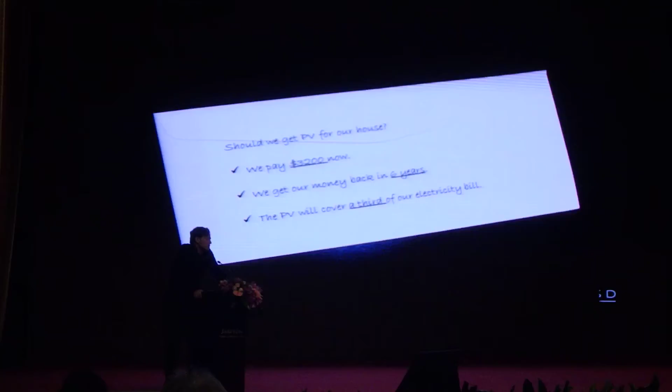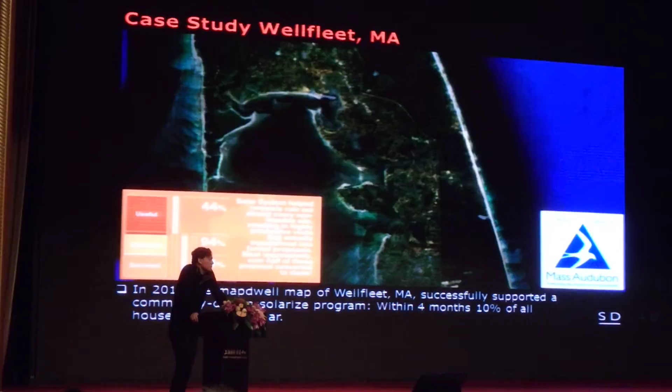How well does it work on a larger scale? In order to understand that, we collaborated with the town of Wellfleet in Massachusetts, which is on Cape Cod, which some of you might know. And we worked there with the Mass Audubon Society in a solarize program. So they went to everybody in Wellfleet and said, get PV for your house, look at our map. And a lot of people did.

They contacted the solar installers in the region. The solar installers discarded, by looking at the map themselves, 44% of the projects because the roof wasn't ideal. And then when they actually went to a site, 94% of the time the installers made a proposal. And the best part is that 54% of the time the proposal was accepted. So the rate was really encouraging. In 4 months, 10% of all the households bought a PV system.

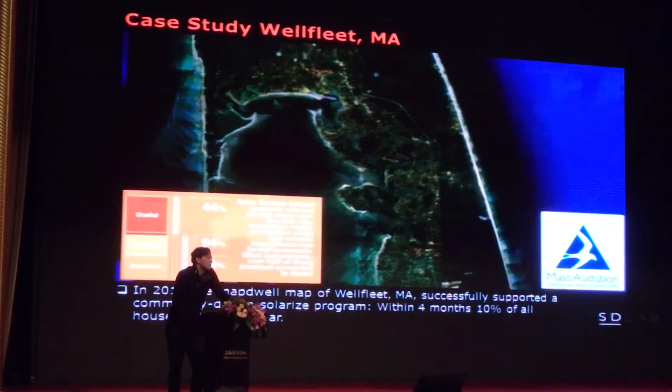And this just shows you the advantage of getting information, unbiased information, to both sides, the client and the installers. So we are hoping in cities to create equal types of penetration over the years, but with more diverse technologies than this. And that brings us to UMI.

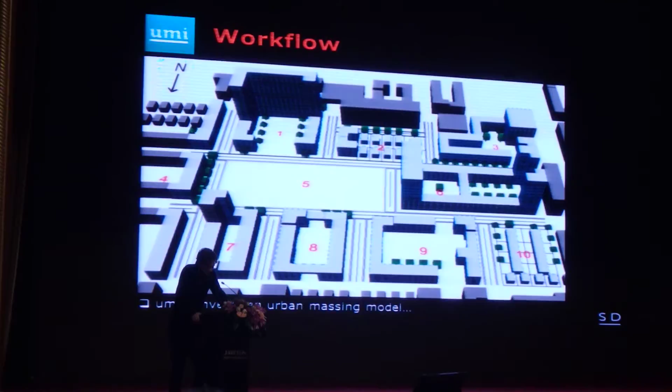UMI right now, if you want to use it in the urban planning or the architecture world, you can go to urbanmodeling.net and download it. It's a plugin based on top of a CAD environment that's widely used in urban planning and urban design called Rhinoceros 3D. When you open it, we are actually creating a kind of BIM database for a city. And then what you have to do is draw a massing model of your city, buildings, trees, and streets. And we then convert that into an energy model, for example, that allows you to do a very detailed analysis.

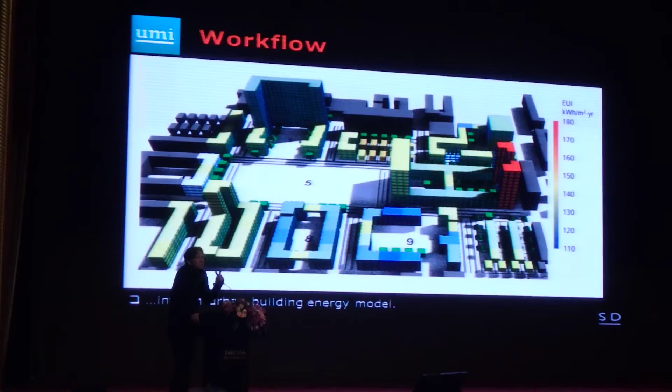So of course the question might be, especially if you do BIM in that field, where people routinely pay $15,000 and more for an individual building model, is this model any good? This is what I'll try to talk about in the next 10-15 minutes. So how does one actually build an urban building energy model? And I know there are quite a number of individuals in the audience that do similar work. We recently wrote a review on the topic, and I hope we didn't miss anybody. If we did, it wasn't intentional.

So what are the key ingredients that you need to model the city? Well, you have to understand the weather and hourly data. That's a very well-established field. There are lots of databases for this available. You can combine this with urban heat island effect models. You can look at the future. That's a research branch in our field that has existed for a long time. And you can use similar tools at the individual building and at the city level.

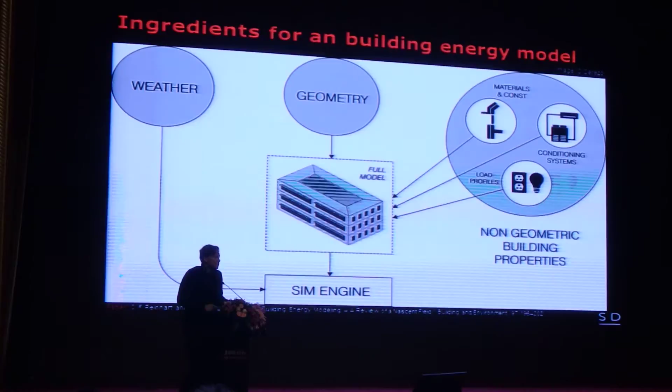Then for the city, you also need the geometry of the city in sufficient detail. You then need what we call the non-geometric building properties. So you need to know all these things that are hard to get. How is the city built? How is it being used? What kind of HVAC systems are in place? And you combine all of that in a simulation engine and get your output.

So starting off with urban massing models, where do you get that from? In the easiest case, in most of the Western world, you would get from the city GIS data floor plans, and if you have the building height, then you can extrude that and you get these 2.5D massing models of the city. That's an easy start. These models often are not that good. The main reason is that people are not clear what the building height is. Is the building height the lower part of the roof? Is it the top of the roof? That doesn't apply everywhere, but it's a good first start.

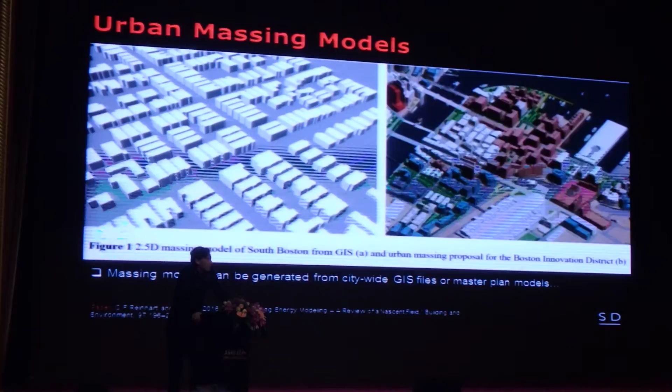Of course, when you look at innovation districts or new environments, you will often have something that you see on the right-hand side, very detailed massing models that the urban planning office is providing for you anyhow. Now it becomes really academically, or just technically, challenging when you're in areas where there is no GIS model. So we are building a model of Riyadh right now with 5 million people. I thought that was a big model, and then I heard Darren is modeling Shanghai with 24 million people, so I felt utterly inadequate this morning. But in Riyadh with 5 million people, there's no GIS, but lots and lots of LiDAR data.

Because for the oil fields, LiDAR data is collected all the time because people want to know how the sand dunes move. LiDAR stands for light detection and ranging. That's a technology where you fly with an airplane over an area and you collect point cloud data of these surfaces.

So what we are working on with the Center for Complex Engineering Systems in a case like this is that we are creating, based on an analysis of LiDAR, three-dimensional models, such as the one you see on the right-hand side. So all of this is to show that in terms of geometry, we tend to have in most parts of the world sufficient data to create these types of models.

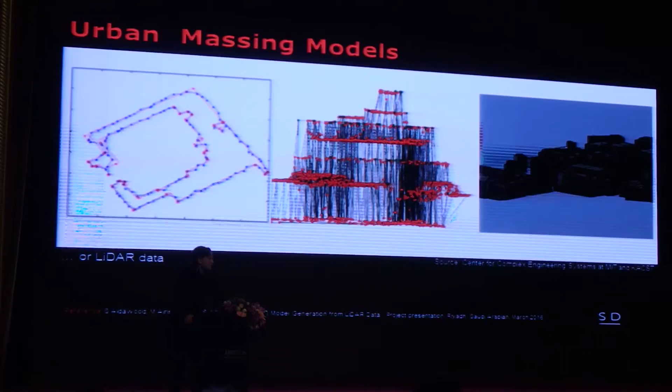One of the members of our group, Timur Dogan, who is now a professor at Cornell, developed this algorithm that we call the autozoner that can automatically generate an ASHRAE 90.1 Appendix G compliant energy model out of any form and shape that is possible. And you could, in this way, automatically, out of the massing models that I showed you before, create an urban energy model. The effort level for that is a little too high because the models would run too long.

So what we are using instead is something that we call the shoeboxer. The shoeboxer is an approach where we are taking a whole city and breaking it up into representative little shoebox models where one side touches the outside facade. It seems like a gross simplification of the actual thermal models that are used in practice, but we found that the approach at the urban analysis level works extremely well.

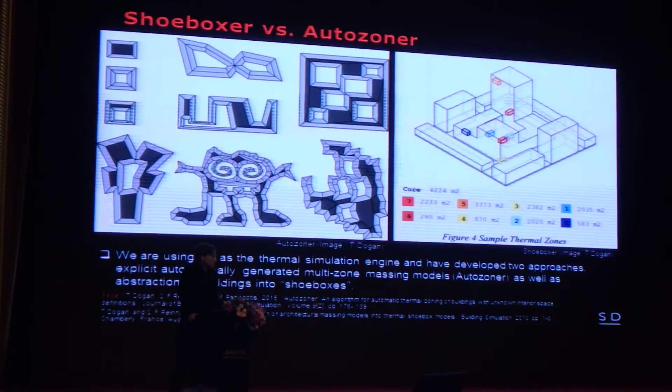So now we have nearly everything. We have the weather, we took that from other people, we have the massing models, we have a simulation engine. Now the tricky part is of course getting all this non-geometric building information. How will we be doing that? But starting off, at least we're trying to make the process as painless as possible by developing a data format that can be used by a lot of people so that if we've done it for one city once, we can do it again.

The next step is to say we, of course, are not going to model every single building in the city, but we have to take a whole building stock and do what has traditionally been done: create archetypes where you group similar buildings together. And then you only need this input for one building at a time.

Once you have this data combined, and we right now have archetype libraries for Lisbon, Portugal, Boston, and Kuwait, then you don't have to do the work again. If you have a city next to Lisbon, you could basically repeat that, and that way the effort you spend building a building library the first time pays off. So this is the process of how you can create an urban building energy model.

But now, of course, the question is how good are these models overall? So we have a workflow, but we have no idea if the workflow is any good. So in order to understand that better, we started off in Kuwait City in a neighborhood called Al Quidiziah, where we looked at 200 buildings initially. And these were all single-family homes, or they call them villas there. You see Al Quidiziah on the left-hand side.

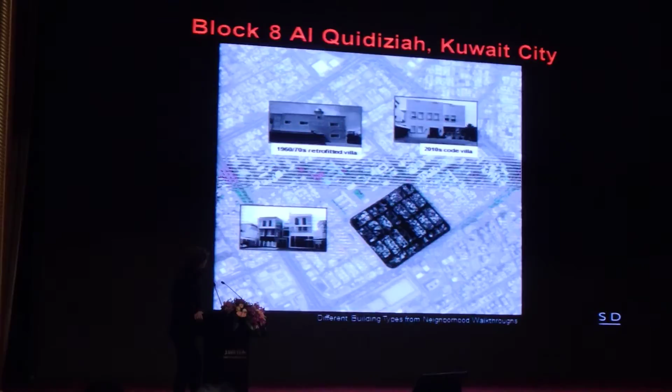So our first attempt was to just say we're modeling this neighborhood, one building type, one type of occupant, and then you see here our energy use intensity distribution in dark gray, and in light gray you see the measured results. Okay, so we weren't very close there. Then we went into the neighborhood and understood the building archetypes a little better.

The building stock divided it into 4 different building types. And then we got 4 different building types, 1 type of occupant behavior. We got the spread a lot better. It got only really interesting when we started using a Bayesian approach to model occupant behavior in buildings.

And the way this works is we use a sample of buildings and we create 800 different stories of how a building could be used. So we have families with lots of family members, high density in the building, and a lot of equipment, high thermostat settings, and we have all kinds of combinations of those. Then we throw these different stories at the buildings for which we have measured data, and what we find is that only some of these stories stick.

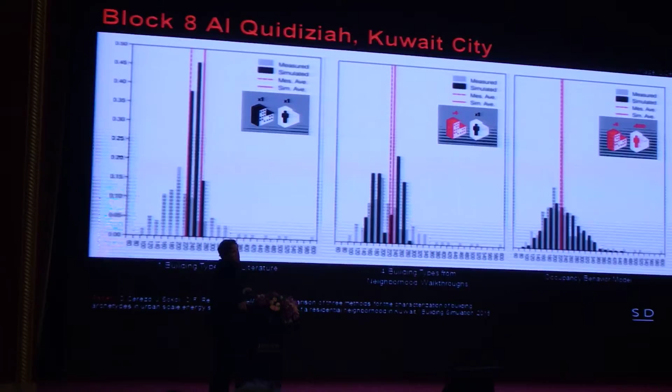We don't know which of these stories are true because we can't go into the building easily due to privacy concerns, thank God, and figure out what's going on in the building, but we get likelihood distributions of behavior. And then when we want to model a neighborhood, we model each building 100 times. That gives us an uncertainty for a building, and if we overlay that for all buildings, then we can create this variable. So in this first study we were cheating because the data that we used to calibrate our model and the test model were the same.

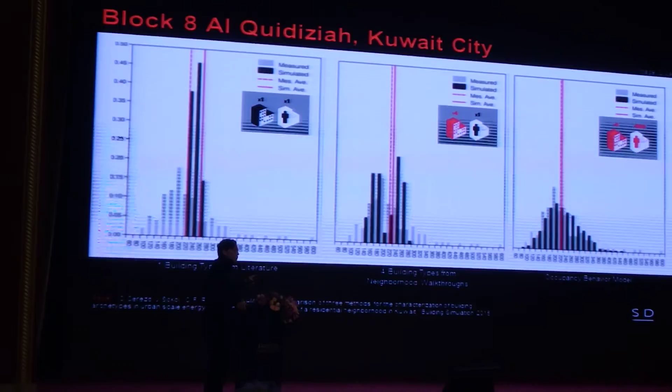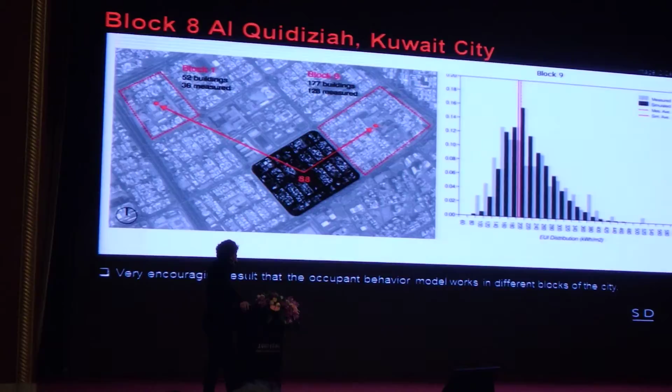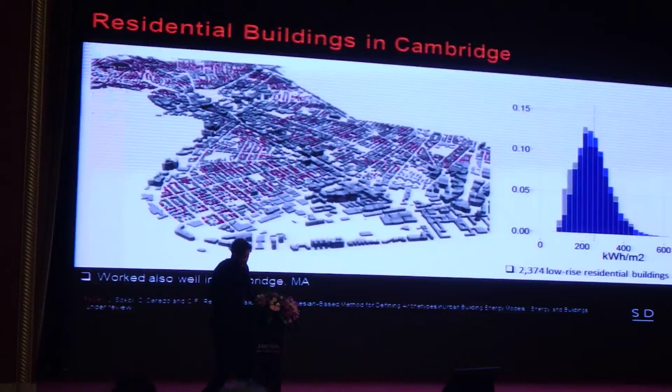So then in the next step we went outside of the neighborhood that we had looked at before, and we modeled other blocks, so different buildings, but we assumed the same behavior, and there our model still held very well. So then we went back to Cambridge, Massachusetts. We picked 400 buildings for which we had monthly energy data. We modeled 400 buildings, created our building behavior model, and then tried to model 2,500 different buildings. And again, as you see on the right-hand side, this works very well. So based on that, we know we have a technology that really allows us to pin down energy use distribution in a neighborhood. I quickly, in the interest of time, go into more details.

What this means is when you have annual energy data, then your calibrated model will also only be able to rightfully model annual energy use distribution. So you really have to fit your data. If you want monthly results, you also need monthly data to calibrate your model to. And in Cambridge we showed that this is a poor fit if you use a model based on annual results to look at monthly energy use intensity distributions. You get way better results if you use monthly measurements.

Okay, now we are in the enviable situation that we actually have a couple of building models in the world which are calibrated. What can the computer actually do now for us that we didn't know before? So the first thing was just looking at what-if scenarios. That was pretty standard. We worked in Kuwait City. We did a symposium for half a day last December. We invited key government officials and other industry stakeholders, and we showed them that for this neighborhood, if you put in off-the-shelf technology, you could reduce the energy use of that neighborhood by 85%. And that was really interesting because it allowed us to highlight the opportunities that buildings offer to decision makers, and it also allowed them to develop aspirational goals. That's possible.

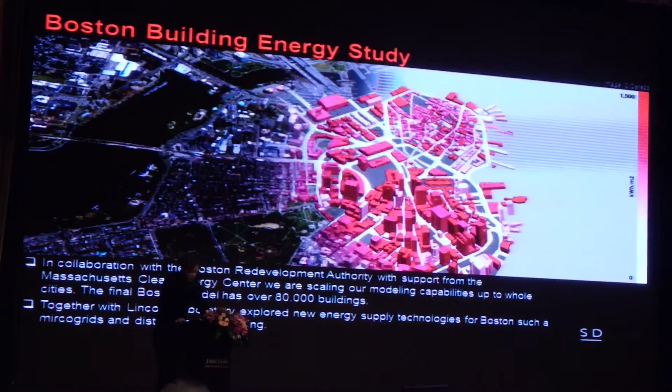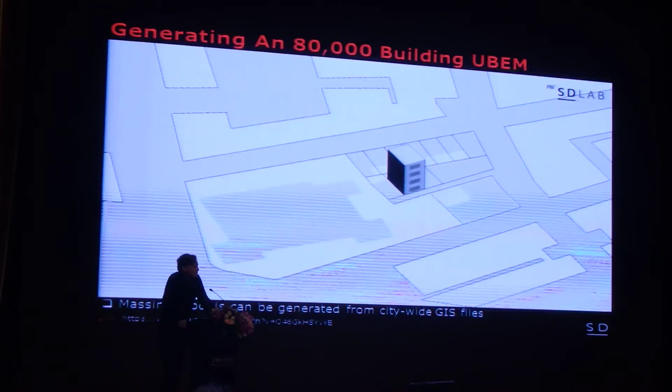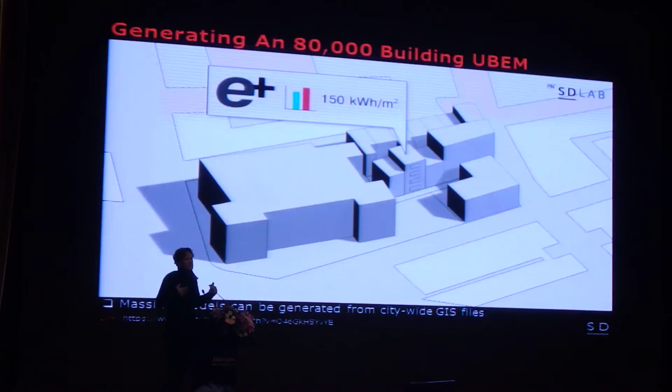Of course, one could say, well, do you really want to base your whole analysis on just 200 buildings? So in order to show that the same concepts also work at a larger level, we worked last year with the Boston Redevelopment Authority and did an energy model of Boston with 80,000 buildings. The process is the same as you see here. We use the GIS data set. We automatically extrude it to find the floor areas, where the windows are, where the neighboring buildings are. And then we run an EnergyPlus model for each building in the city. And the main effort here was really to automate the process and make it so robust that you don't have to do anything by hand anymore.

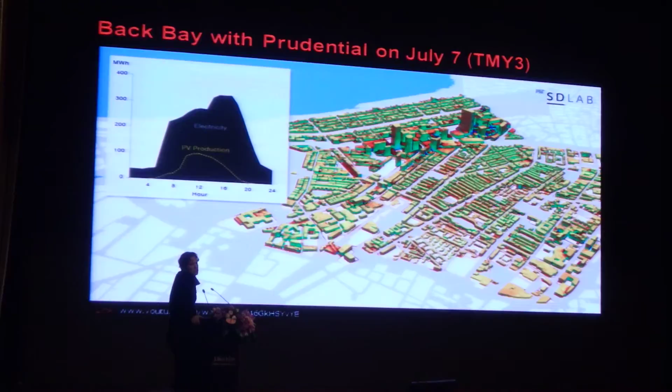What do you get from that? Well, you can get these energy use distributions within a city. You don't learn too much because intuitively it's clear that the downtown core uses more energy than the surroundings. I think it becomes more interesting when you zoom into a neighborhood. This is Back Bay and Prudential Center in Boston. We actually look here at the hottest day of the year, so you see the electricity use simulation for that neighborhood on the hottest day of the year. And if you then say, well, what would happen to the distribution if we were to introduce photovoltaic production, then you get this famous duck curve.

So in light gray, you see the current electricity use simulated. If you were to introduce a lot of photovoltaics, it's pretty well established, then we know the two don't coincide in peaks. You get in the middle of the day PV, in the afternoon the air conditioning peaks. So you have this duck curve. That's very difficult for a utility to match this load profile.

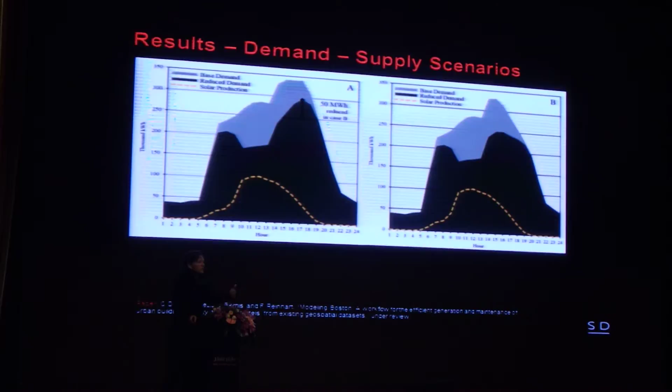So what we looked at here, what would happen if we had a smart grid solution where the utility could relax the thermostat settings by about 3 degrees Celsius of every commercial building in the neighborhood. And the interesting part is really here, from a technological standpoint, if you follow these solutions, you have one central control for all the Nests in the city, then you can dramatically reduce the peak loads. There are, of course, very valid questions of privacy, but this really provides you a framework to quantify the benefits of doing this.

This project is something that I really like, From Targets to Reality, that was more zooming into a particular neighborhood in Boston called the Dudley Square neighborhood, and looking at energy use as well as census data. So based on census data, we can tell for every building block in that neighborhood who is living there, what's the educational level, what's the income level. We broke that whole neighborhood population into 4 types: elderly couples, families, young professionals, and students. We know the mix of those demographics within the neighborhood, and then we can do all kinds of analysis, starting off again with what's technically feasible.

We developed for that residential neighborhood 2 sets of energy efficiency measures. Energy efficiency measures 1 is something that you can do anytime, such as changing light bulbs, weatherization, and then energy efficiency measure 2 was more comprehensive, blown-in insulation, different HVAC equipment, and so forth. So we get the typical 17% and 60%.

Now it becomes really interesting when you start combining what is technically feasible with actually who would have to implement what. So in green, for reference, you see the 2 goals for Boston. Boston wants to reduce carbon emissions by 20% by 2020, by 80% by 2080, very convenient. And here you see, if you want to reach the 2020 goals, you need only to concentrate on homeowners in that neighborhood and have them put in energy efficiency measures 1 and 2.

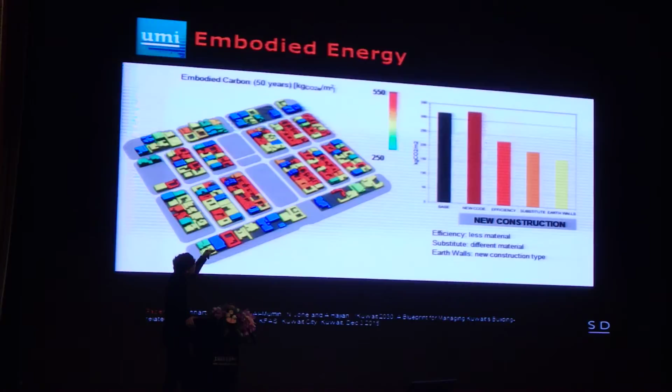Here just gives you an example how this would play out in Kuwait. Here, the neighborhood that you've seen before in Kuwait, if we were to change in new construction the efficiency of the structure, so we use less concrete, then we go from the high red bar to the low red bar. If we substitute traditional concrete that they use with fly ash concrete, or if we replace the walls with earth walls, then you see we get lower and lower levels. So you can do this type of analysis as well.

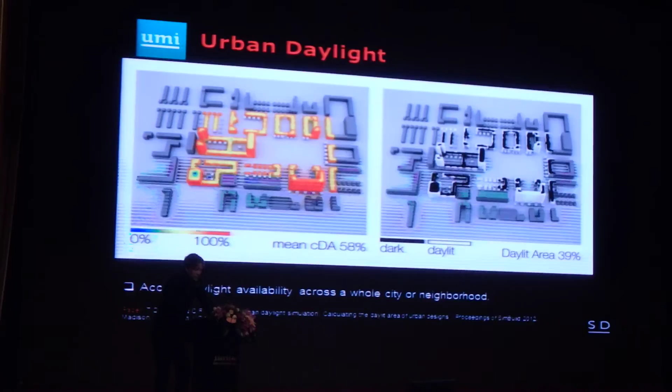This has been traditionally a field that I have been focusing on, daylighting, access to daylight. That can, of course, also act as a placeholder for urban quality, health, and so forth. We developed a module, again done by Timo Dogan, that allows you to do annual daylight prediction at the urban level in a short period of time. And this year, we are celebrating the 100th birthday of zoning laws in New York City, which are pretty much the first ones in the world.

And here you see the results. You don't only see 2 results, but effectively we have a top line and a bottom line, and in total you see 5 different types of urban blocks. And what one sees here is that it really matters which type of urban prototype we use, how much daylight we end up with.

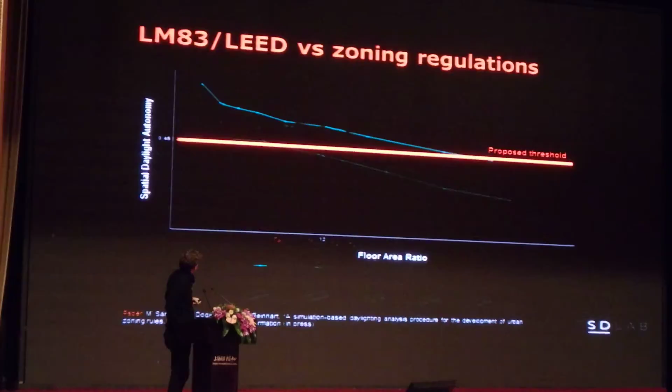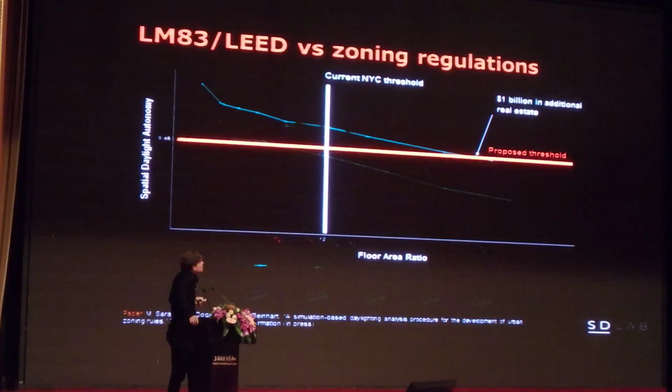So we want to stay above the red line, and we see in the case of the top stencil towers, we can get FARs of up to 25, which is incredibly high. To compare, an FAR of 12 is pretty much the maximum that you can build in Manhattan today. If you use this typology, you can create a lot more real estate while still maintaining access to daylight. If you convert that into money in Midtown Manhattan, the extra floor area you could build with this new zoning law is $1 billion per city block.

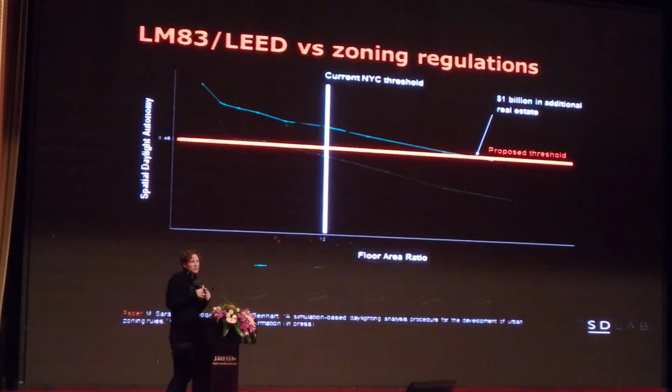And this, of course, is very important because we said at the beginning we need more city dwellers, so either we can spread out or we can densify. So we have to identify the winners that combine densification with good resourcefulness as well.

Outdoor thermal comfort is, of course, key, linking into what I said earlier, because if we have more and more people in the city, then it matters more and more what the quality between the buildings is, and we heard from Stephen earlier that that's a key concern for many as well. In the past, what we've mostly done was very simplistic, just looking at outdoor temperatures and direct solar radiation to create hot and cold spots within the city.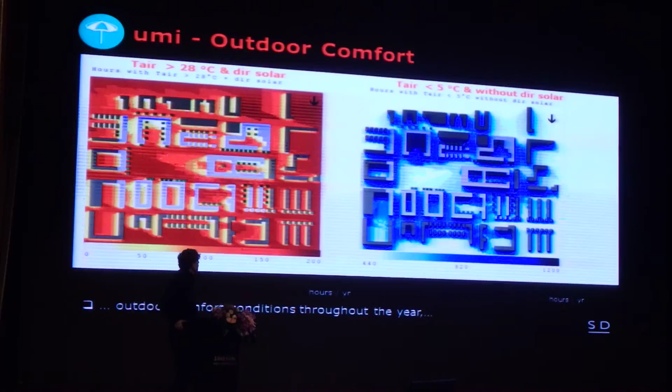Now we just embarked on a 1-year-long study of the MIT North Court, where we are modeling for every hour, for every square meter in that North Court, for a whole year, the outdoor thermal comfort conditions, and at the same time we have various devices out with which we are tracking people moving through the space. You get about 17,000 people moving through that space in a week. That allows us to link resident flow to outdoor thermal comfort conditions, and our goal is to test how suitable our current predictions are and what successful urban interventions could get more people moving through the space.

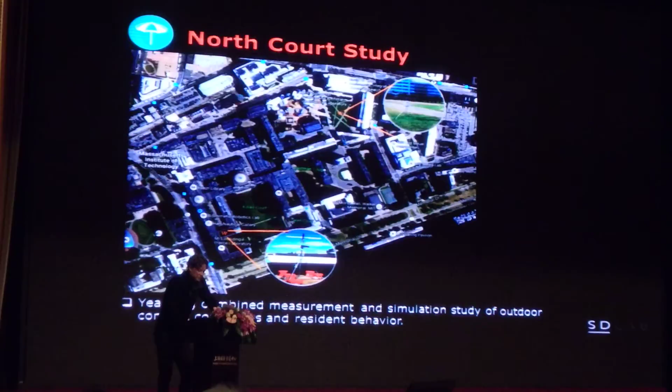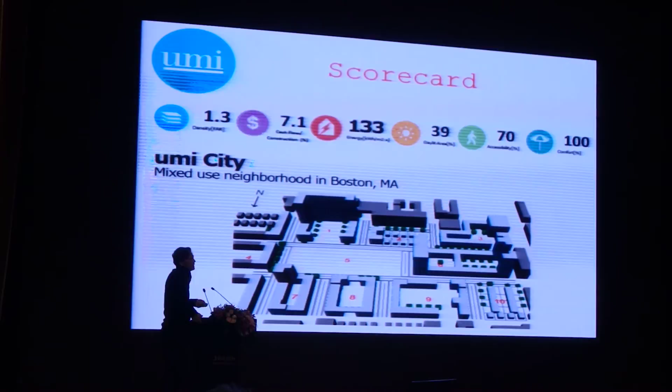And where does this all lead to? These are my last couple of slides. Well, I'm a big fan of these scorecards where you present a neighborhood design or solution, and then you show the density, the cash flow, energy use intensity, daylight, comfort, and maybe other aspects of urban performance. And then you have an urban stakeholder debate.

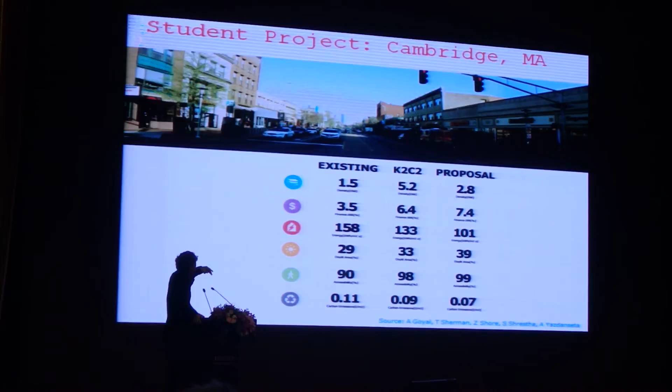So in the case of Cambridge, Massachusetts, we modeled an area called Central Square, which is right between the Harvard and MIT campuses, a few years ago. We had the existing conditions, a city proposal to triple the density, and one of our proposals, which was just doubling the density but using micro units. And you can see that financially that plays out pretty well, because smaller units charge higher rents. Having less built area also led to more access to sunlight for the buildings, so better energy use intensity and more daylighting.

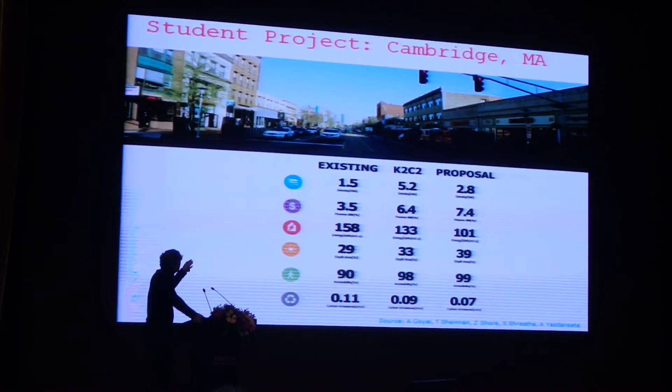So I like this type of comparison because you can explain it in a very short period of time to non-experts, and then you can have a debate about which of these trade-offs you are willing to make or not.

In order to facilitate that more, we actually just built this UMI dashboard. This is a web-based platform which allows you to load in our UMI files right in there, and it shows you this type of analysis that I showed you before here in real time. And you can zoom in and drill in and understand your results better, because of course visualization is a key aspect of making a lot of people understand what you're doing.

And this became really interesting because it shows you really the opportunities. People obviously used to live in cities based on food that was locally produced, so it's more than we think, especially if we use hydroponic types of technology. This project also showed you very nicely that at one point you have plants and photovoltaic competing for roof area, and then it becomes an interesting discussion, what should be put on the roof.

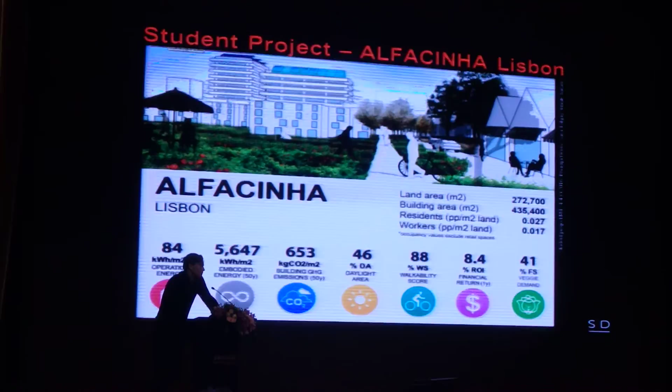And technologically, it's pretty interesting. You can actually move something into the basement, and in some cases, it's better to have an urban plant machine in the basement supported by photovoltaic than actually have the greenhouse on the roof. So I think there's a lot of changing paradigms that we can look at right now.

And jumping in the interest of time, two more quick projects that I wanted to show. This I show because it's my favorite one of all times. This was after the Haiti disaster. A group of MIT students used our tool with funding from Mercedes-Benz and the World Bank to develop for 50,000 people this disaster relief area.

And they used the walkability module to place pumps and informal markets so that the neighborhood would be as connected as possible. And the reason why I like this is because it just takes a laptop and a few gifted people to have an impact on so many people with practically no money.

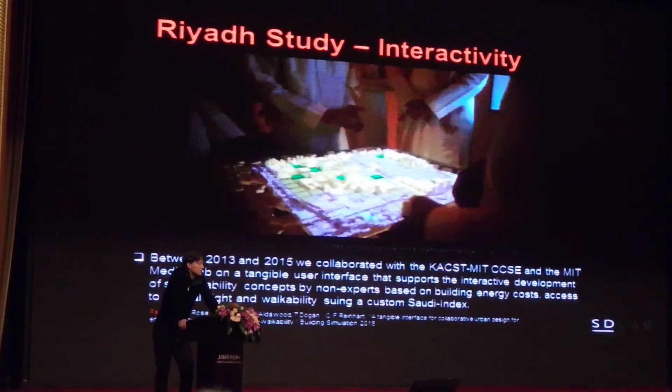And this is the last project that I wanted to show. So one way is to say we are the urban experts, we are modeling 3 or 4 different variants of a city beforehand, and then we present that to the stakeholders. What we did here, this is a collaboration with the MIT Media Lab, the Changing Places group. We developed a real-time version of our UMI tool and linked it to a Lego table from the Media Lab.

So what this table does is it's actually Lego pieces, and we have 18 different parts that you can put on the table. When you place this, we have a scanner from below that scans in the typology, feeds it into UMI, and then we are projecting in color on top of it the performance for daylighting, for energy, or walkability of this neighborhood.

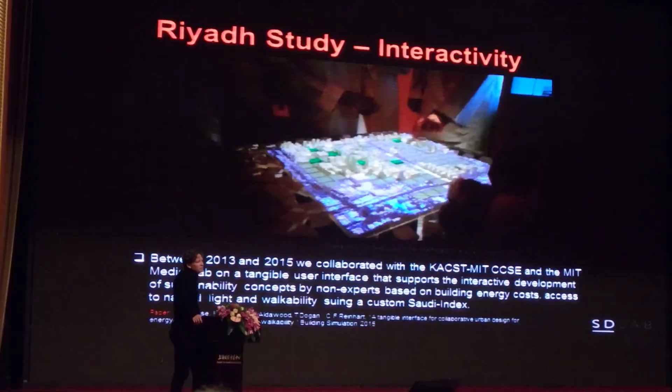And then we gave that for a whole day to the planning board in Riyadh to play with it and compete in 4 groups. And we turned off the sound, but you heard people arguing vehemently in Arabic about what solution for the neighborhood would be best. And it was just a fantastic experience to see how far these types of tangible user interfaces are really good at engaging the creative potential of a lot of people at the same time. You obviously have to make some compromises in terms of detailing, but there's a lot of buy-in that you get.

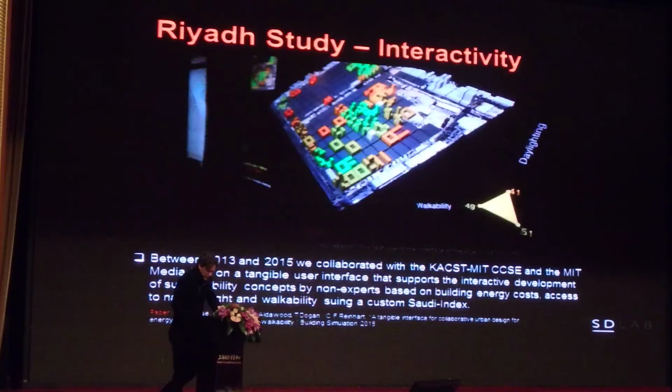Now we really have to create and train a new breed of people. We need people that have an understanding of energy policy, urban planning, and of building physics. And if you combine all these qualities, then we can let them loose to the world. And at the same time, of course, we have to work with cities, practitioners, to explain to them what the capabilities of our tools are.

And my hope is that these tools will be very widely applied in the near future, not just by our groups and by a few of the groups that are at this conference, but by all the cities in the world.